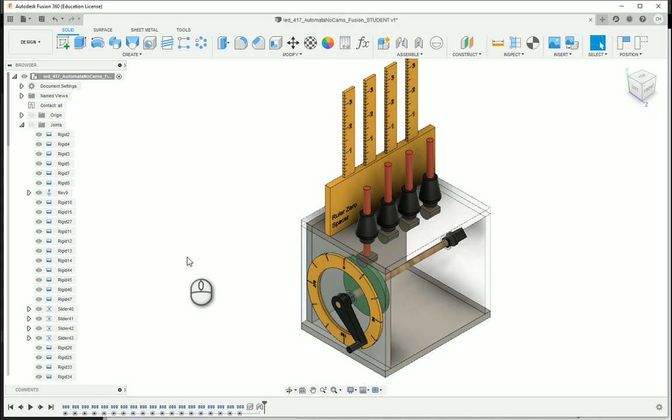So big thing as we go to look is anytime you go through and get one cam, you're going to notice we have our pear cam as noted from our last video loaded in there, and it is following and going along with the motion that is desired for this particular profile.

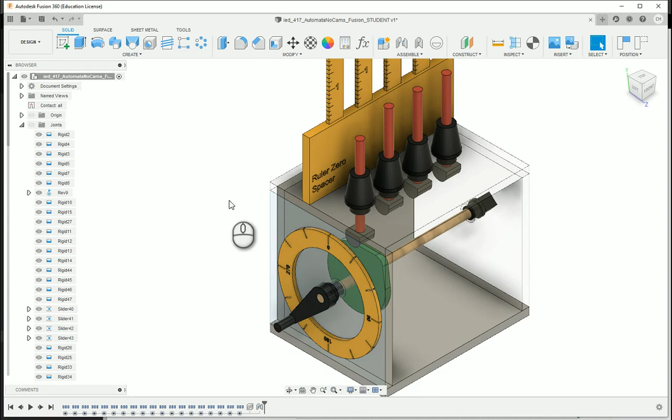As you test this out and get this going, the one thing you may want to do before you add a second cam in is go to Revolute 9, which is the axle. I'm going to right click and say go to home position. Anytime you're going to add a cam in and you're going to constrain it or join it to the axle, you want to make sure that it is in the home position.

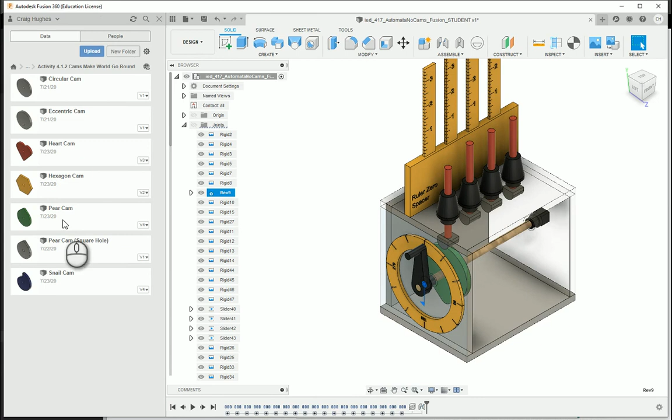So I'm going to open up my data panel and pull in the Hexagon cam and drop it here into the file. Closing the data panel, I'm going to move this up here into place and get it in the right position. We do want to make sure that the follower will be in the lowest position on the cam. So I'm not going to want to install it like this because the points are going to be generating movement as it goes along.

So I actually want to rotate this 90 degrees. That way the roller, when I've installed this into the box, is going to sit on this flat edge. And these points on the opposite sides are going to go through and generate the maximum displacement for our movement.

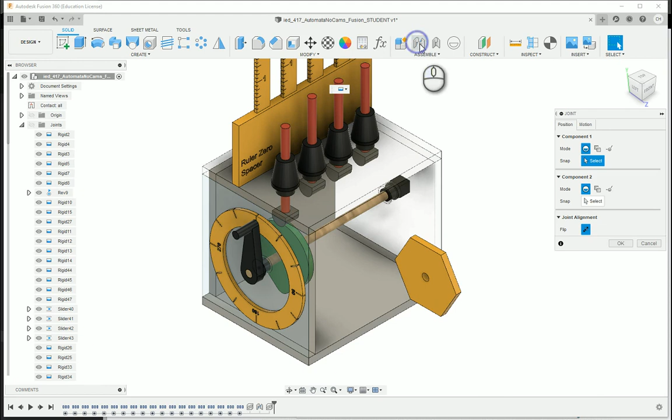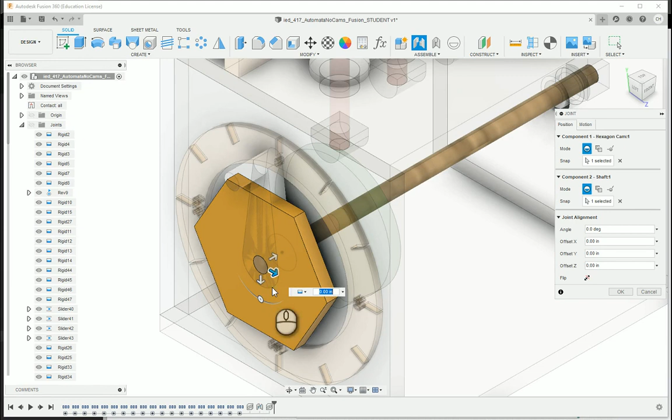So I'm going to choose joint. Again, making sure that the revolute crank handle's in the 0 position. That's what we want. I'm going to choose a rigid, and when I zoom in here, you want the black circle around the hole and the joint origin chip on the edge. And then I'm going to do the same thing over here on the axle, making sure that the front face of the cam is going to be flush with the axle.

Let me turn to the side, and I'm going to offset this. This one ends up being about 2.25 on the offset to be put right underneath the roller. So it makes these numbers real nice. And I'm going to say OK.

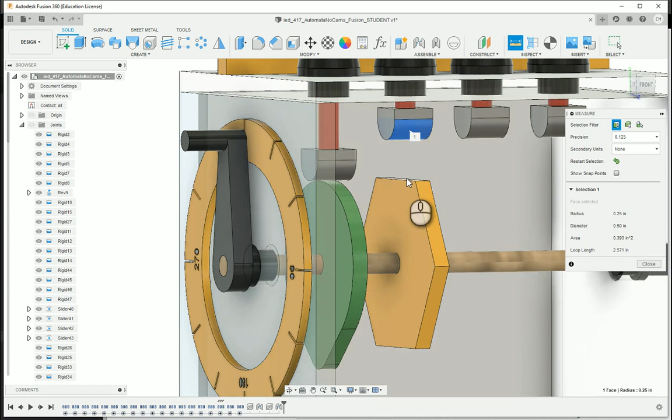In this position, very similar to how we did before, this process is the same for every cam as we go to put it in. I'm going to measure, choose the bottom of the roller. Might want to rotate down because I want to make sure that I choose the face. You'll notice it's highlighting the face. You don't want to click the edge so much as you want the face.

And what you're going to see here is when you look, this is going to have a value of 0.475 from arrow to arrow. Again, it is going to pick up certain other points because of the arc shape that is on the roller, but 0.475. I'm going to close.

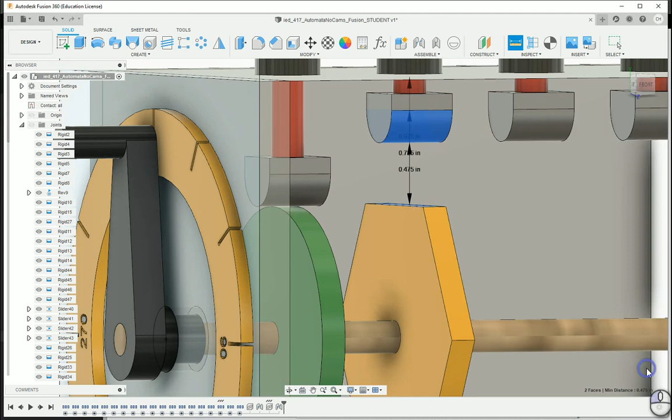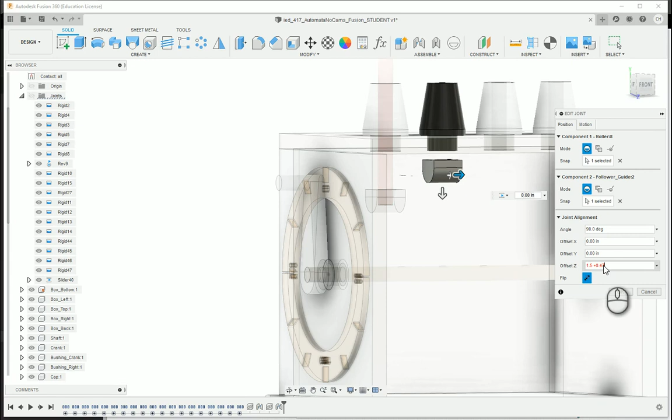And I'm going to go over here to my slider joint, and the slider joint, if I take a look, is slider 41, and it highlights if I just do a single left click, and I can see what that is. I'm going to right click and choose edit joint, but we're going to edit the joint limits here in a moment. So edit joint, we're going to do the offset plus 0.475. That's going to go ahead and drop that roller down to be on top of the cam.

And then now what we're going to take a look at is I'm going to choose my Hexagon cam. Let me scroll down in my browser to find it, and I want to go ahead and edit in place. So editing in place is kind of a new feature. I'm going to turn this to the side, and down in my model history tree, I want to edit the sketch because I want to pull some information.

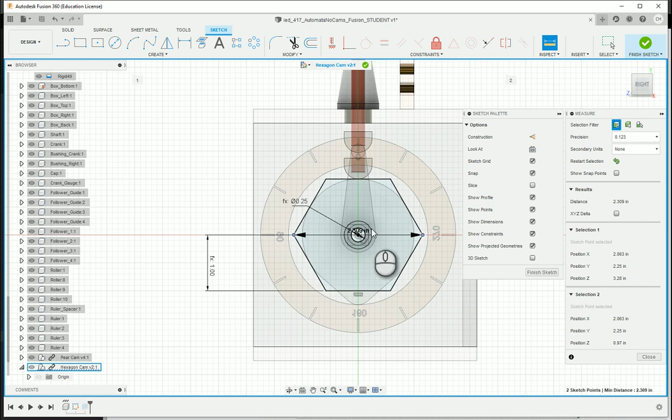Now here from the center to the outside edge is 1 inch, but the thing is we want to know what's the maximum displacement, what's the largest dimension that we see on the cam. So if I measure from corner to corner, these two opposite corners are going to give us a value, and that distance, if you zoom in or if you check out here, is 2.309.

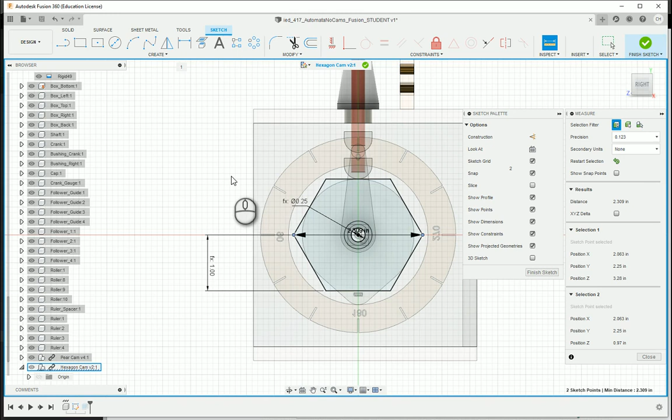The nominal diameter of this cam, if I restart the selection, is 2 inches. So I'm going to subtract that value. So that means that when I measure from here to here, as this thing rotates around, the maximum displacement is 309 thousandths of an inch. So I'm going to go ahead and close, finish the sketch. I'm going to finish editing the cam, and then I'm going to take a look at those joint limits.

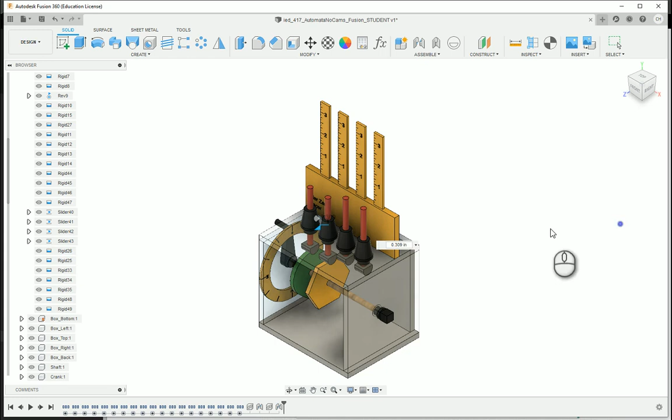So I'm going to scroll up to slider 41. I can click on that symbol to edit the joint limits. My maximum, 309 thousandths of an inch. And then the rest position, I'm going to check and leave it 0. So we always want it to be at that 0 position, and I'm going to say OK. So now, here is the cam. There's the roller. If I go through and rotate that around, I can see with our hexagon cam we are getting the desired motion as we go along.

A little note about this animation: the other thing that you can also do with the Revolute joint, you can right click on Revolute 9 and choose Animate Model, and this will generate that automatic motion. Now the only thing is with this motion, depending upon your computer and some of the other specs that you have, you may see this animation get a little choppy. And it really depends on processing power of your computer and things like that. So mine does pretty well with it. You're just going to have to see what you get there as far as that goes.

So in the next video, we'll take a look at installing a third cam. We're going to install a snail cam, also known as a drop cam, into the Automata box. And then later on we'll take a look at getting those values from our rulers to make this happen.